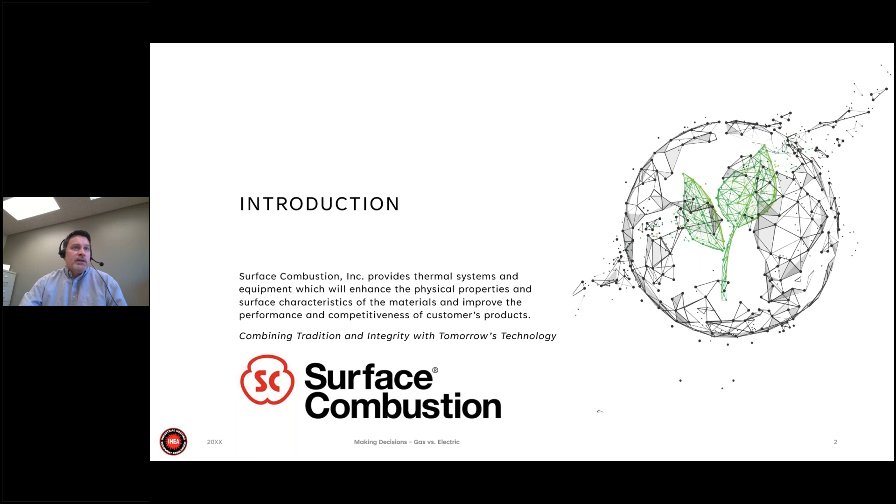As a furnace OEM and as others that provide furnaces, Surface Combustion is what we would say energy neutral on the selection of gas or electric heating. We can design either gas heated systems or electrically heated systems, and we offer both. What we intend to do here, like in this webinar, is to educate the customer on how it affects their application and other aspects of their operations.

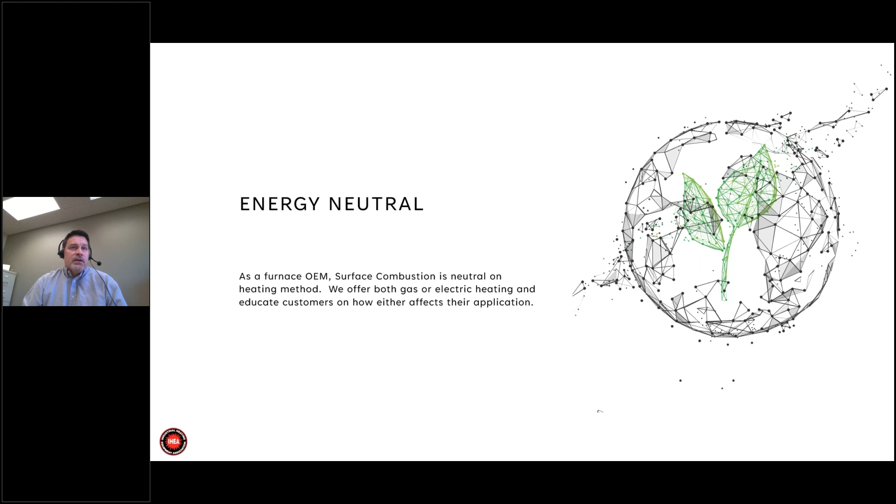This definition is actually IHEA's definition of electrification that I wanted to share here. It's reducing the emission of greenhouse gases or carbon emissions by converting fossil fuel usage to electric power supply by sustainable sources. That is one of the main topics here on the macro level, and the sustainable sources is really the secondary scope from the plant.

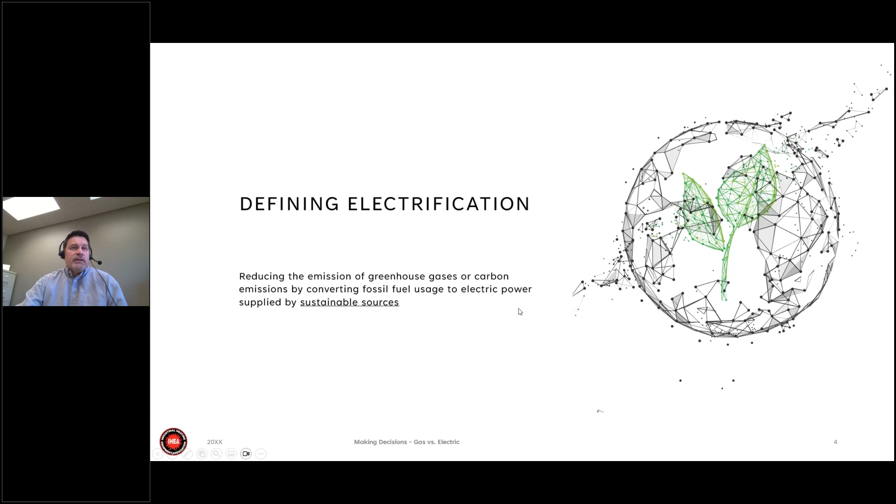So with that in mind, the overview of today's webinar is going to talk a little bit about a macro level, what's affecting the decisions of gas versus electric today, talk a little about gas heating systems and electric heating systems that are available, then compare some applications on a specific furnace type with selecting either gas or electric and how that might impact the actual furnace design, and then some conclusions.

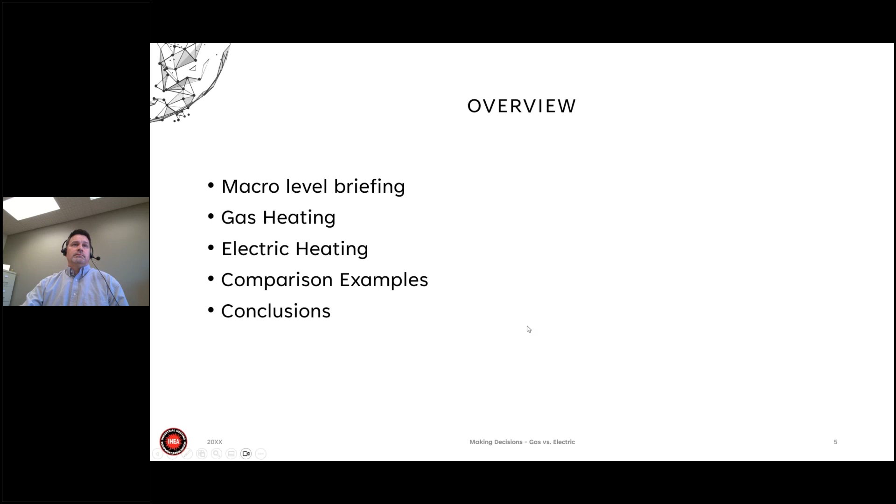So overall, an overarching macro level discussion here is we're looking at the commercial markets, some geopolitical issues, and regional demographics. After COVID, there's been a lot of supply chain recovery, and with the supply chain recovery, bringing things back near shore for geopolitical issues as well. But through this, there's environmental accords, global conflicts, and in each one of these topics, you can see at the bottom, energy, energy, energy, and it goes by like prices for the operations and commercial, geopolitical issues, the policy that's being in place and being enforced now, and then regional demographics, where you are located and what kind of energy you have available in your area.

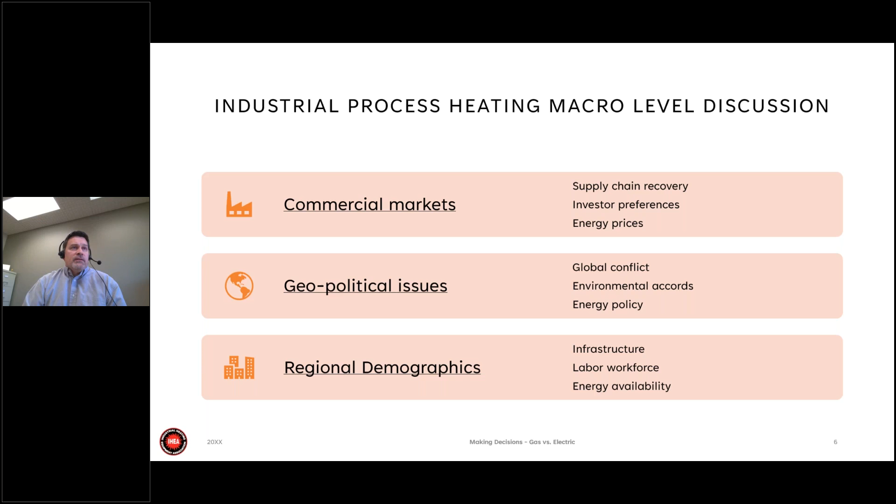Boardrooms more and more have been looking at this environmental, social, and governance aspect for investors to invest money in their organizations. ESG is paramount on a lot of decisions coming down for capital equipment. So we've been getting asked more and more to look at electrification of furnace designs. The ramp up of industrial production, relocation, nearshoring - as you bring production back, you're bringing it back with the purview that you're going to be needing to look at electrification. And then we're back to energy - you have to consider the policy, the availability, and the costs.

So in the US, and this goes back to sustainability, this chart is just showing where we are today with energy mix and emissions. Sustainability was to move from greenhouse gas emitting energy, where we are today in the US, to more sustainable energy. And as you can see, there's a mix of power sources that we have, but most of the power in the US here is from coal and natural gas.

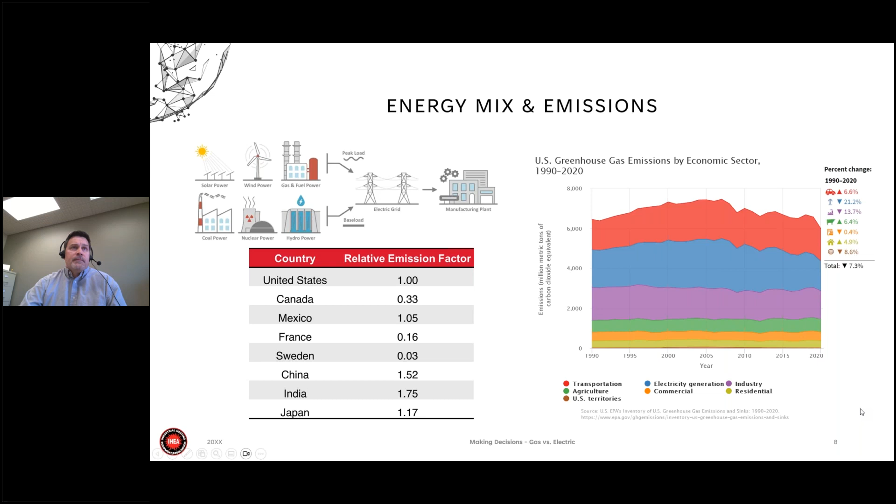So overall, there are some opportunities - looking for some subsidies, grants, or utilities cost sharing. It'd be wise to check into some of these opportunities. Grants are always a challenge to prepare, but they're worth looking into to see if you can have some networking and some co-development of projects. You can check on the federal and local subsidies for bringing production back to the US or into your existing plant. And then utilities are a good resource to see what kind of opportunities there are and to see what kind of available energy there is in their network.

Now, as we go to the plant floor from the macro level, we've typically been looking at what the best application is based on the amount of heat you can put into the furnace to try to get you the most production for your operation. But the environmental push for electrification has been pushing the pollutants upstream to scope 2, and for sustainability efforts, we would rather consider all the costs that you have from your plant operations, such as capital expenditures, maintenance, and operating costs.

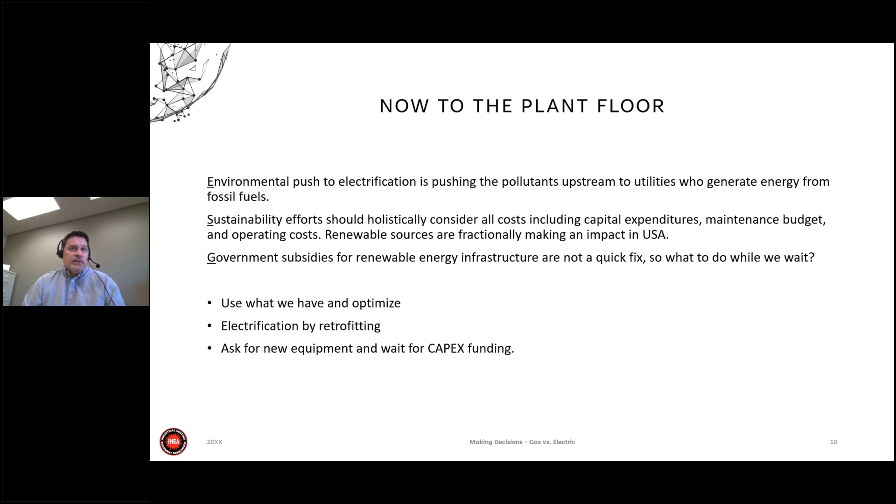So as far as making decisions, the historical thought process was to select the best furnace for a specified process first, then consider gas versus electric heating. And what we're going to be talking about here in this webinar are natural gas heated furnaces and resistance heating, electric heating elements. There are different types of gas heating or burners that you can look into - we're just going to comment on a couple of those. And there are different electric heating methods that could be topics for other discussions, from infrared to induction heating, but we're just going to be talking about resistance heating elements.

For gas heating, there are two types - you can have direct fired or indirect heated furnaces. The delineation is direct fired: your process gas or process atmosphere inside your furnace are the products of combustion. Some materials can be treated in that way, and typically it's the in-process parts that are in between - an annealing step or some kind of heat treatment step that's in process that will have continued operations in your plant. It can be set up to have recuperation for higher efficiency as well. And the fuel source is typically hydrocarbon. There are some oxy-fuel operations for glass melting, but really for this one, we're talking about natural gas burners.

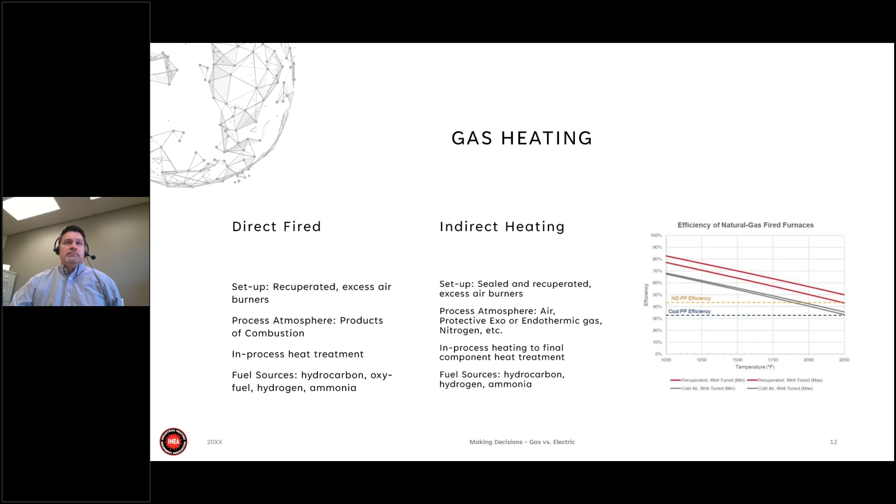The chart on the right is showing the efficiency of natural gas fired equipment at different temperatures. So if you have a specific temperature or process you're looking at, like carburizing at 1700 degrees, you can get a recuperated, well-tuned burner somewhere in the 65% efficient range. If you're generating that power with natural gas at a power plant, that's the gold line, you're having a lot of transmission losses to have an electric heated furnace, where you're going to be at like 45% efficiency. So it does make a lot of sense to have natural gas on a furnace still today.

Here's an example of an alloy radiant tube, which has indirect heating. The U-tube is one of the more common types of radiant tubes installed in furnaces. The setup is that you have a burner going down one of the legs of the U, and the exhaust comes out the other leg, where you would have a recuperator that heats up the air, and preheated air is then put into the burner to increase efficiencies.

The advantage of this compared to some of the other burners we'll see is that there are fewer burners and recuperators required in the setup. So there's a lower installed cost for this type of U-tube, but you have lower thermal efficiency than some of the other alloy radiant tubes we'll see here.

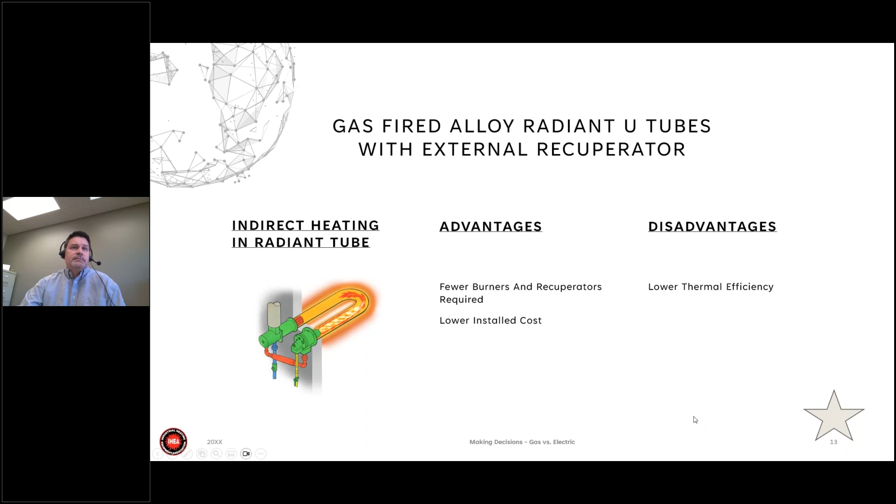This gas-fired radiant tube is actually a single-ended radiant tube, and it has alloy tubes with an internal recuperator. The burner sends the flame through the center of the burner tube, and along the walls of the radiant tube, the exhaust exits the burner. This gives higher thermal efficiency due to the residence time of the flame.

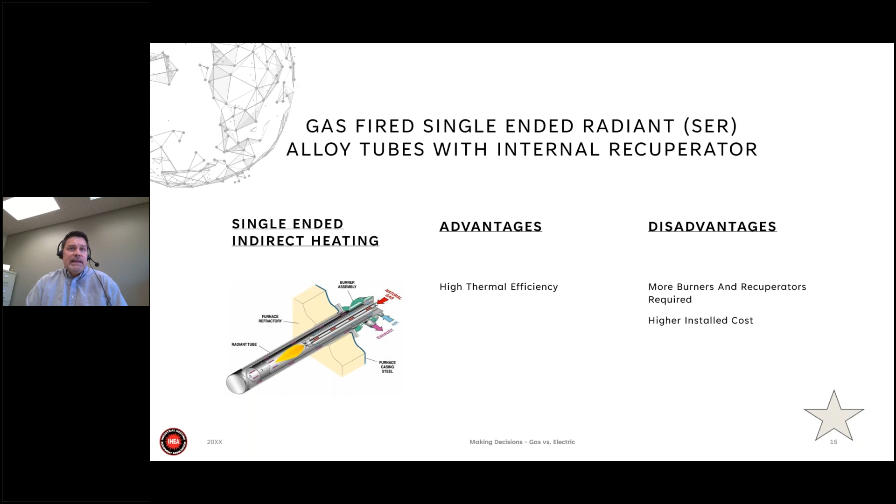But there's only one leg or one tube, so you need more burners and recuperators to get the same amount of heat input, and so there's a higher installed cost.

If we look at materials selection on the radiant tube, we're changing the alloy radiant tube in this design for a silicon carbide radiant tube, which has a greater heat flux and heat release to the furnace chamber. So it has the ability to reduce the number of burners or radiant tubes you have inside the furnace. It has the same setup as the single-ended radiant tube, but just with the silicon carbide tube.

It would have the highest thermal efficiency and the longest tube life. Now, noting that longest tube life, you're removing the high temperature thermal creep of the alloy radiant tubes that you have. So it's eliminating that, and that's what helps extend the tube life.

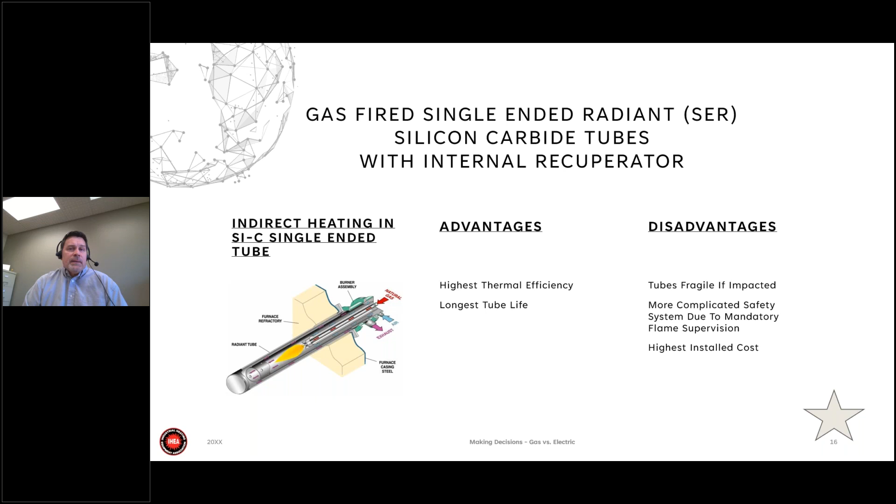But the tubes themselves are fragile, and you have to take care not to have any mechanical contact with the tubes. And there are still safety system requirements for mandatory flame supervision that get a little complicated with the silicon carbide tubes. And just the cost of the silicon carbide tubes themselves makes this option the highest installed cost.

So we're going to look at some of the electric heating technologies that can be applied.

Overall, the advantage of electric heating is that in theory it's 100% efficient. As soon as you turn it on, all the heat is going into the chamber, but we do have some transmission losses from the energy from scope 2. You do remove all the pollutants from the heating system at site, and then you have better working conditions around the furnace as well. You don't have any heat coming off the burners, so it's nicer to work around, not as noisy. You don't have to have the blowers for the combustion system, and it also has the best temperature uniformity and control.

Some of the disadvantages today are that payback is limited due to operating costs and the cost of utilities. The capital costs are expensive for VRTs and for electrical control, and maintenance costs are still fairly high for some of the types we're going to look at. And they are susceptible to breakage and failure, and you're only limited to thermal radiation in a lot of the instances here.

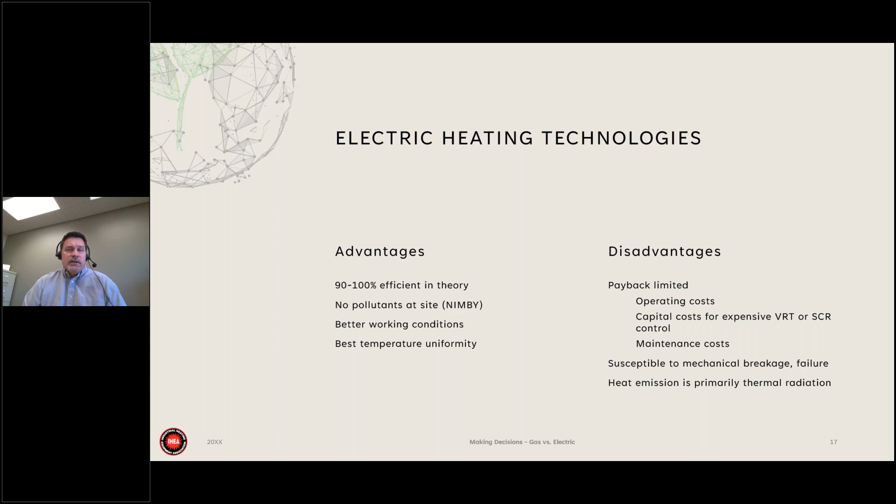So the electric heating elements inside of a radiant tube would be put inside of a single-ended radiant tube like the gas heated system, so they can be applied in the same type of form as the gas-fired radiant tubes. So this might be an option for retrofitting if you had single-ended gas-fired radiant tubes.

These have low initial costs and good temperature uniformity, and they actually perform better compared to gas at lower temperatures. One of the advantages here is if you're looking at retrofitting or in a new design, is that they can be used with hydrocarbon atmospheres such as endothermic or exothermic gas.

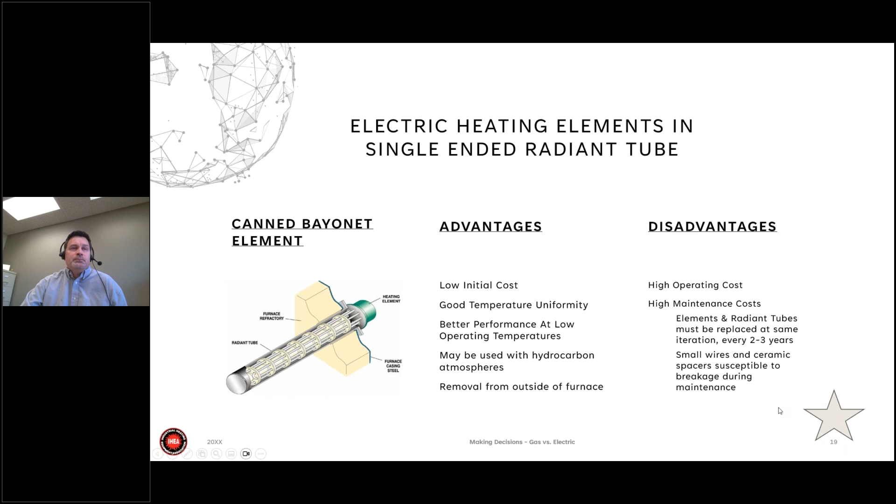These electric heating elements are also good for hydrocarbon atmospheres, such as RX gas for carburizing, endothermic gas. And as shown in the photo, the element is actually a tube, a bent tube that has an airstream going through the center of it. So it's 330 alloy, so it's good for these atmospheres. The airflow through the center actually helps self-decarburize, pulls the carbon out of the tube, so it extends the life. And it's a very robust system.

It's an inch diameter, so it has extremely low risk for breakage. It has good temperature uniformity because you can have a bank of these along your wall. Let's say on a batch integral quench furnace, you can have up to 3 of these on either side, and you can tune them from front to back, so you have very good flexibility to get tight tolerance on temperature.

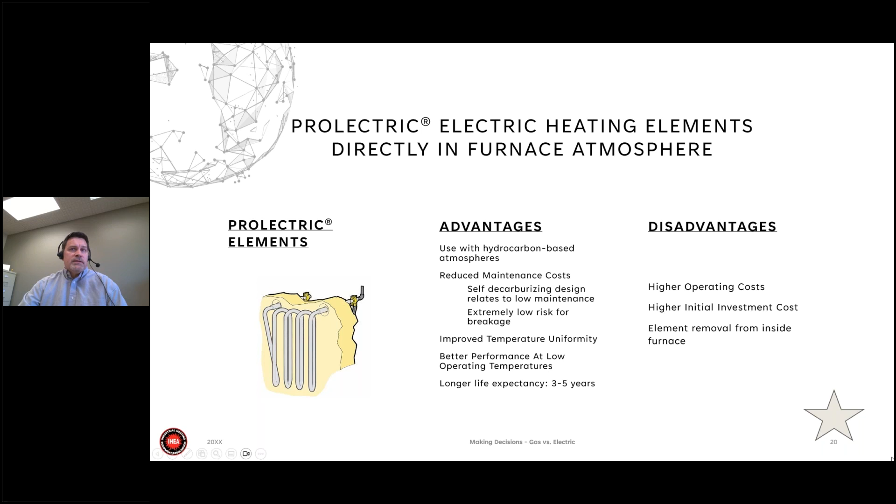And they also do perform well as a common theme for electric heating at low temperatures. This has the longest life expectancy out of the electric heating options that we'll share here today. The major disadvantage for the Prolectric is that you have to enter the furnace in order to remove these elements, but after doing some inspection, they could last much longer than what's shown here if you follow the burnout and other maintenance instructions for the furnaces.

This rod overbend electric heating element is different from the Prolectric because it really is rod, it's not a tube. These are anchored to the wall and actually embedded in the ceramic fiber insulation modules, so you can wrap the furnace walls with these heating elements.

They have high thermal efficiency and they're fairly easy to install and easy to maintain. You can just remove one and then re-weld it to replace the area. So they make them a good option for a cost-effective solution for electric heating.

One thing that you'll have to check on is the application guide and check with the heating element provider, because these elements are not suitable for all atmospheres, and they are made out of different elements, so you have to select the right element for your application.

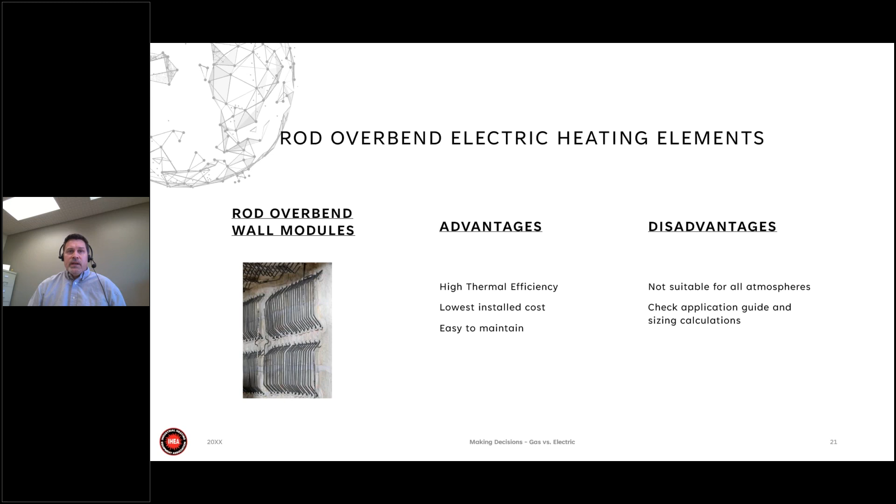This ERT design, which is an electrified radiant tube, it's like the U tube that we had shown previously, or actually this one is a Trident tube. On the bottom left, you'll see a lot of copper bus bars going around the outside of the radiant tubes on the exterior of the furnace. This would actually make the three-legged Trident tube the heating element, and you would have resistance heating on the Trident tube.

This technology was developed in the 70s to be able to switch between electric and natural gas, as you know the utilities costs were fluctuating in the 70s, but it could still apply today if you wanted to have both options available, although it does come with a higher price tag and more maintenance because you're maintaining and installing dual systems here.

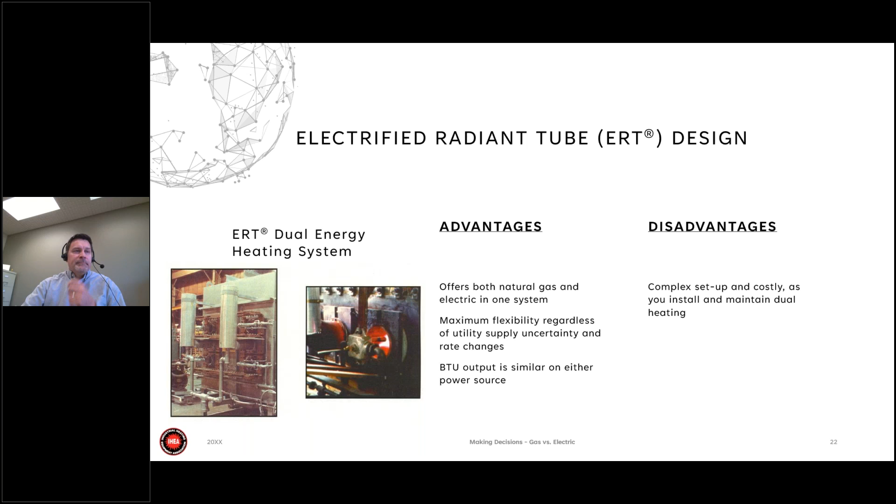The silicon carbide resistance heating elements. This one here is a dual leg silicon carbide heating element where it's installed at the top of the furnace of this rotary hearth furnace. And you can see there the light yellow lines are the glow bars that are extending into the furnace around the inner diameter of the furnace that has been removed to show the inside.

These silicon carbide elements have high thermal efficiency, and they have maximum operating temperatures that go above indirect gas heating, so you can apply them to higher temperature processes.

These elements actually do get brittle and will break if they're stressed at all. The high maintenance cost for these really is that you have them set up in a series of three. So as you have to change one of them, you should probably change all of them that are on that circuit. Otherwise, you'll have different resistivities that will cause some other maintenance issues.

So in hydrocarbon atmospheres as well, you want to make sure that you're not getting any shorting out, and making sure that you have good connection or insulating the elements from any kind of carbon buildup.

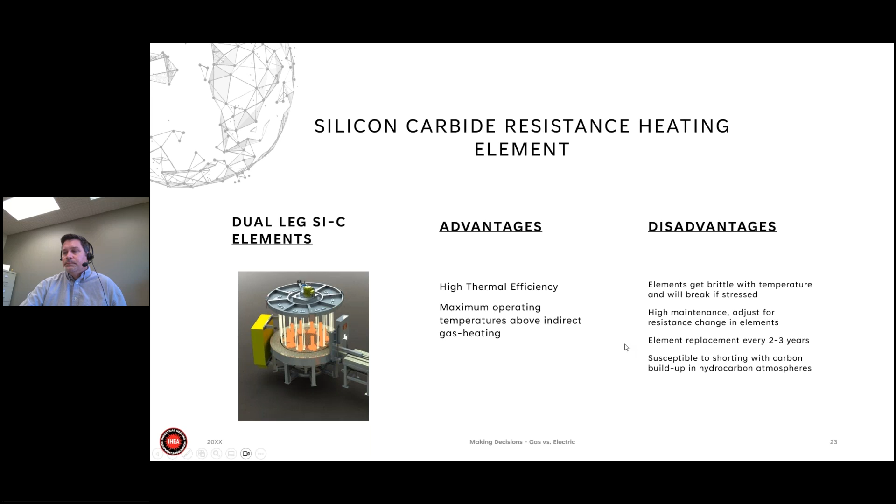So now moving into an example comparing gas versus electric. The first example is going to be a batch integral quench furnace.

This batch integral quench furnace is shown in a photo on the right. It has a hot zone with RX endothermic gas and natural gas enriching in the hot zone. And then, once it exits the hot zone, it comes out to the vestibule shown here, into the oil quench at the bottom of this vestibule. Typically used for carburizing, carbonitriding, and ferritic nitrocarburizing, or neutral hardening.

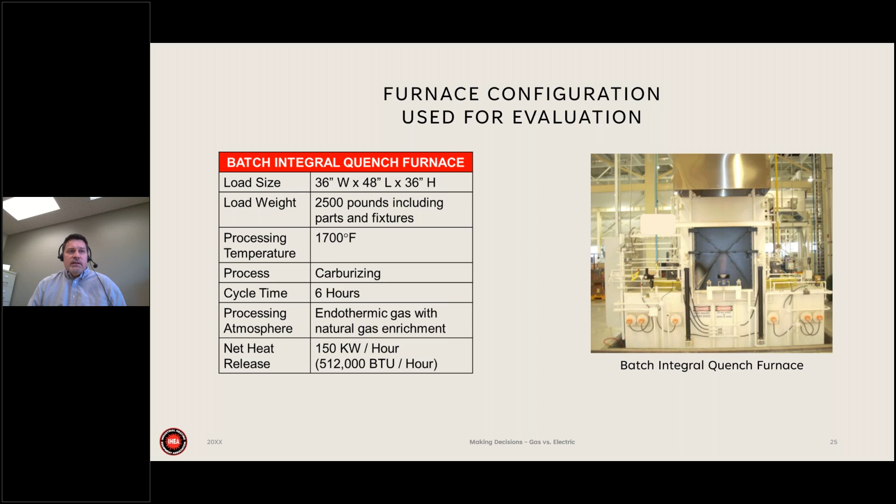The furnace used in the evaluation of the data I'm going to share had a 36-48-36 hot zone size, and the load weight was 2,500 pounds, including the fixture and the parts. So that's gross loading. Operating at 1,700 degrees, carburizing for 6 hours, and I mentioned the process atmosphere already, with a net heat release of 512,000 BTUs per hour.

Other assumptions in the calculations are a net heat release of 50 BTUs per square inch per hour and 90 BTUs per square inch per hour for alloy radiant tubes and silicon carbide materials, respectively.

I'm sharing the natural gas costs that we're using in the calculation. These can be rerun for any of your local actual costs at your plant. But it was $10, and then 10 cents per kilowatt hour for comparison.

And all the installed costs, when we talk about total costs here, we're including all these miscellaneous items, just making sure they're all included so you have a full system, such as burners, radiant tubes, heat recovery devices, air blowers if required, exhaust hoods, installation, and all the other components. And we're just looking at 6,000 hour per year operation.

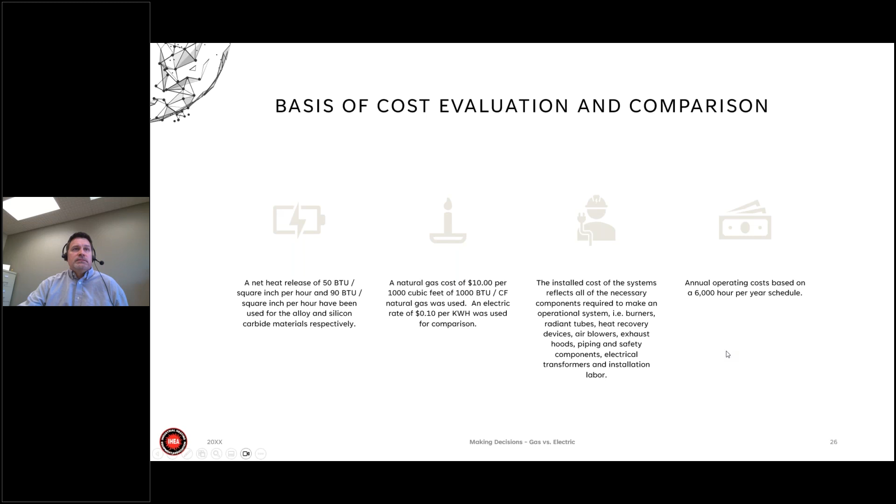So these tables comparing the different types of heating sources, at the top you'll see alloy tubes, alloy single-ended, silicon carbide single-ended radiant tubes, and then the final two columns are the electric heating options. So the first three are gas heated.

As we go down the columns, you can see how many tubes are required for each of the heat sources, the tube material, and then really what we're trying to do is get in the same amount of heat input for each of these options. And then we'll see what kind of operating cost we have to do the cycle.

So with the heating system, operating cost for a 2,500 pound load, you can see that the cost going from gas heating to electric is more expensive for the same process. And in the installed system cost, you can see the silicon carbide, as I mentioned in the center, is most costly. And then the total annual operating cost at 6,000 hours is shown, and the 20-year utility cost is shown at the bottom.

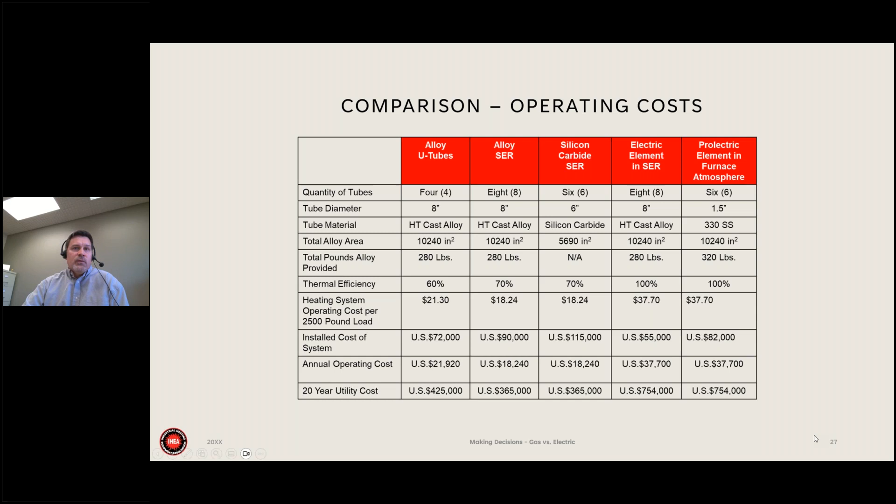You can see that electric heating is most expensive, but the installed cost of the system is less. So if you're looking to invest in electric now, and have the assumption that there will be less expensive renewable energy in the future, that would be something you can invest in now and look for ways to conserve and turn to renewable energy.

Some of the maintenance cost considerations are the same. It's showing the gas heated on the first three columns and electric on the final two.

The Prolectric has the highest operating reliability for electric, while for atmospheric contamination, the single-ended electric heating element has the highest reliability. So the alloy U-tubes and alloy are most susceptible to atmospheric contamination.

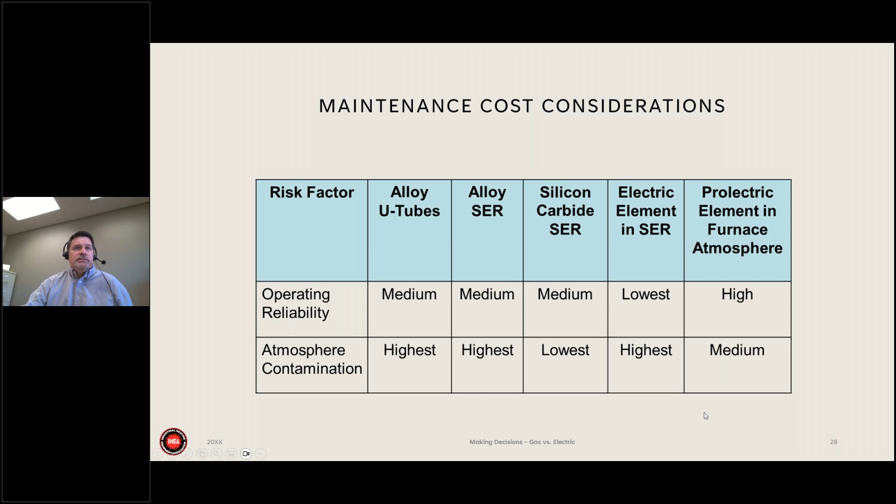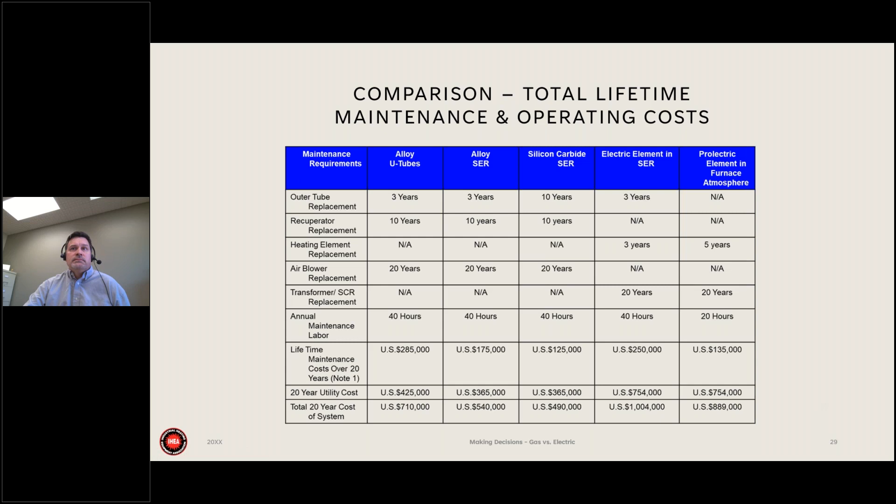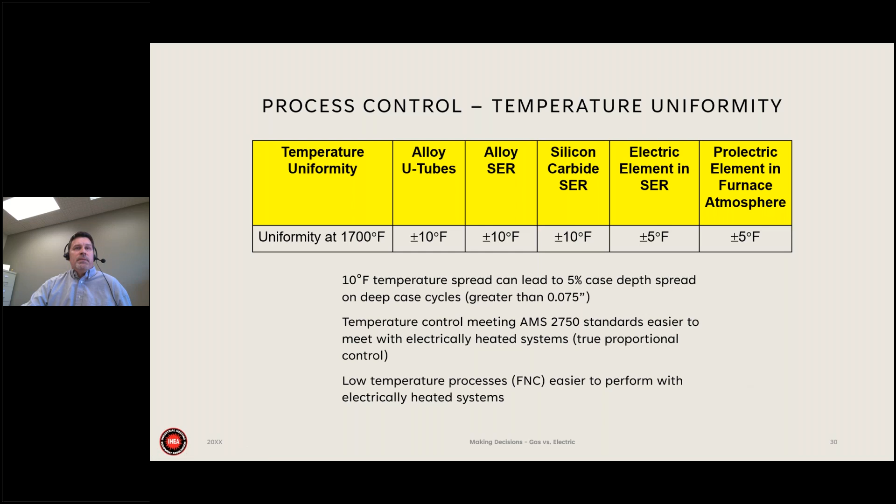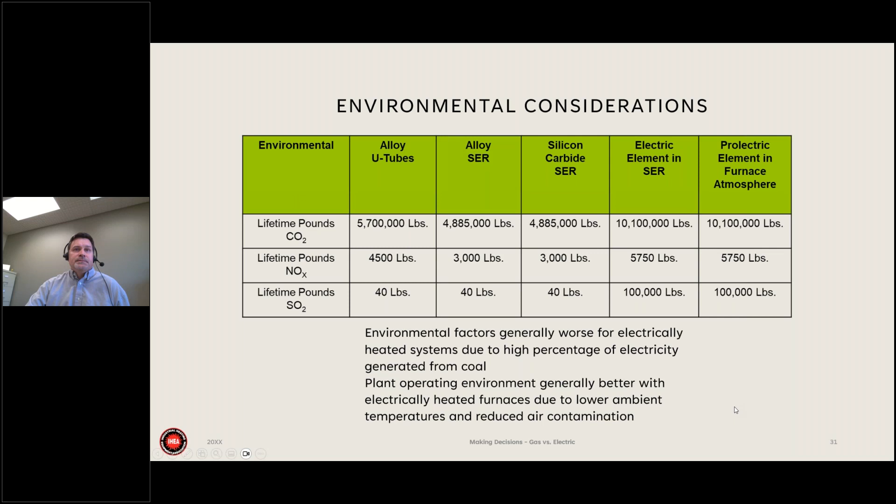We're going to compare a couple other furnace types here, comparing gas versus electric. For a couple types of continuous furnaces, a direct fired versus an air electric furnace, and then vacuum furnace, to show some options there.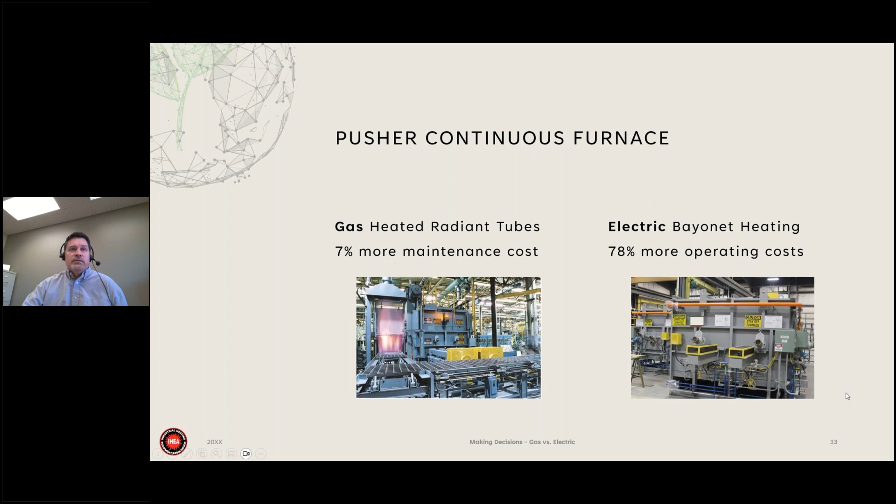However, when you use electric bayonet heating in place of gas, the operating costs are like 78% more costly. So the operating costs, again, are a main concern when trying to choose gas versus electric.

This is a table showing in blue the gas-fired versus electric options for a single row pusher using process endothermic gas, RX gas. Process gas has its own carbon footprint, but it is required in order to do the value-add process for heat treatment. So that will be carried for either option here, gas or electric.

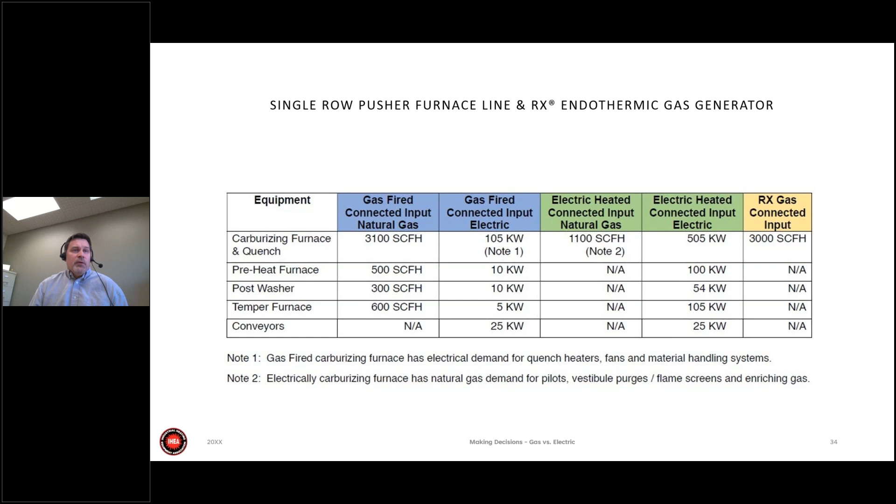In the carburizing furnace, it says 3100 connected, but really it's 2000 for the heating. In the electric heated version, you can see there's 1100 SCFH of natural gas required, and the notes below say that is for intermittent flame screens and purges, and the column for enriching process gas is always required. So this just gives a sum total and a comparison that we can calculate and offer both types, even for continuous pushers.

This type of furnace is a belt furnace. It could be a mesh belt, or in this case, a cast belt furnace. Cast belts offer heavier loading.

The gas type here was a direct fired with pulse fire and recuperation. It cost 5% more, not much of a penalty or savings going either way here. And the connected heat input for the process and production volume was 3.5 million BTUs connected.

The electric option here employed a mix of both the modular rod overbend type heating elements you can see above the hearth, and below the hearth we actually used bayonet inside of radiant tubes to help with the mechanical damage below from anything falling down from scale or the like. And it had a connected power of 1 megawatt. So you have to make sure that you have enough facilities, power from your utility company when you're going to be looking at installing this. It adds up quickly.

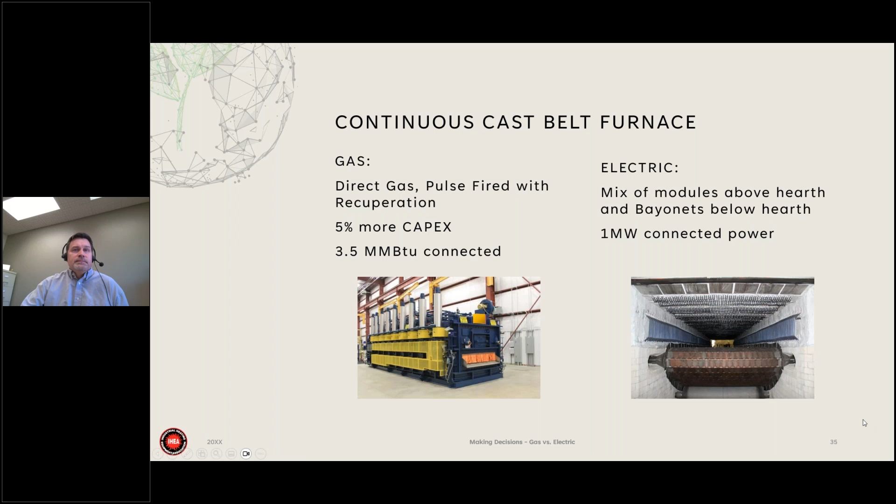Here's an example of direct fired versus electric air furnaces. These would probably be very common in heat treat and in process heat treatment. The direct fired uses product of combustion. It helps mitigate the amount of scale growth on steel parts. You can get radiation and convection with burner placement and flue exhaust, so you can get a good recirculation inside the furnace.

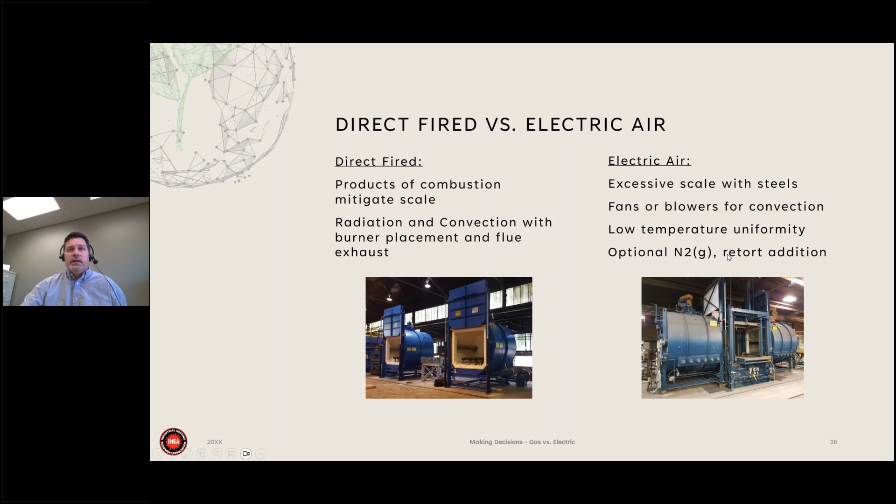The electric air furnaces tend to create more scale at higher and higher temperatures with the presence of oxygen. But you could, at this point, put in optional nitrogen gas or have it in a retort in order to keep the work in the process free of oxygen, although then that enters into its own scope 2 energy requirements for industrial gases.

I wanted to include something on vacuum furnaces because typically the choice is electric, and that seems to be the most common choice here, but there are opportunities for gas, and some reasons why you would choose one or the other.

Gas can actually have a radiant tube that has a tight, vacuum-tight seal, so you can set burners inside the vacuum chamber using silicon carbide or alloy radiant tubes. Silicon carbide is shown in the furnace at the bottom. The temperature ranges using gas heating in a vacuum furnace are ideal for vacuum carburizing and also for tempering. So if you're in an area with gas, it's a good opportunity to use gas in that instance.

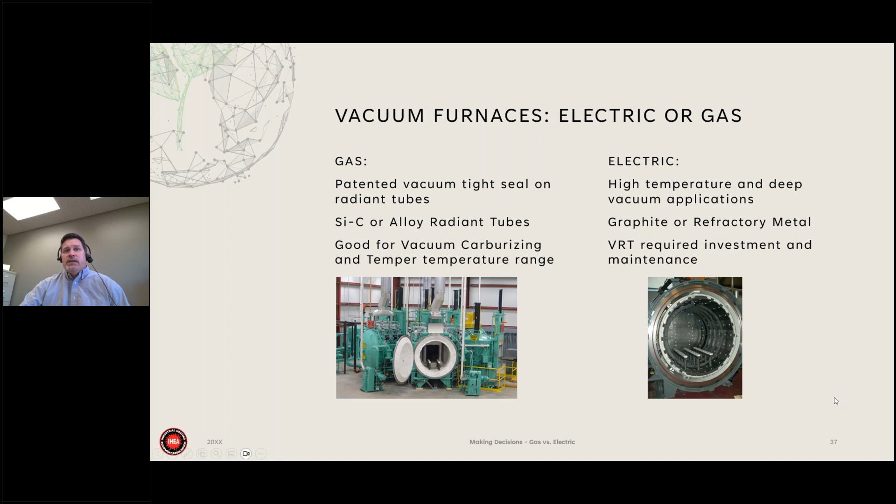For electric, it's best for high temperature and deep vacuum applications, really all vacuum applications, but ideally high temperature and deep vacuum. There are different materials of construction you can use, whether graphite heating elements as shown in the photo at the bottom, or an all refractory metal hot zone with resistance heating as well, electric. And then you'll need the VRT investment and maintenance.

This gives an example of a vacuum temper cycle using the utility costs shown at the top, gas and electric, comparing them for a 1,200 pound load at 1,050 degrees. The operating cost per cycle is shown on the time temperature chart, and it's half the price to do it with gas. So this is an opportunity seldom thought of for vacuum, but if you're electrifying, you can calculate how much it's going to cost to do the same cycle.

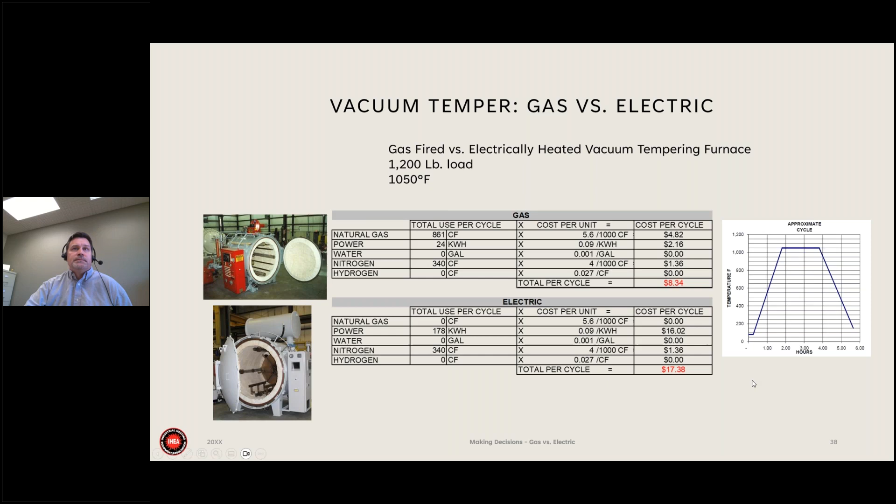So for some, excuse me one second.

For retrofit options, some considerations for electrification: if you're going to retrofit your current furnaces with electric resistance heating elements, you have to consider the plant infrastructure. Do you have the switch gear? Do you have the power supply? Is it available from the utility? Are you in a region where electric costs less than typical, and maybe there are some advantages there.

There are major mechanical modifications required to the furnace, and these are often underestimated because you have to touch the furnace twice. You have to uninstall, modify the casing perhaps, and then install the new heating system. And this is always on the operations floor, probably the most inefficient place to do this, as opposed to getting a new furnace with a new heating system installed. When you look at retrofitting, you're normally going to need to derate the furnace capacity and throughput production.

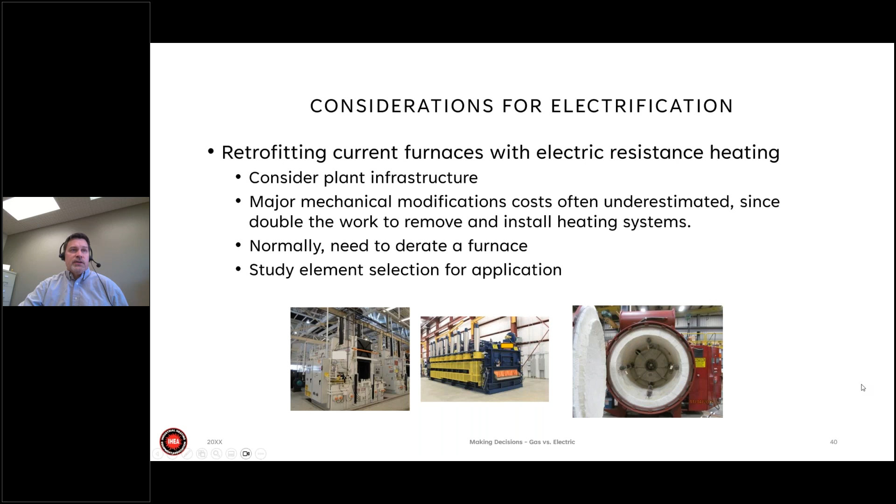You're not going to be able to fit as much heating in as you could with natural gas. You just get much more heating input with natural gas. And then you want to make certain you're studying the element selection and material type for the application. It could be a batch integral quench furnace, continuous belt, or a vacuum furnace - they all have different atmospheres. You want to make sure you're talking to your furnace supplier or the electric element provider to do that.

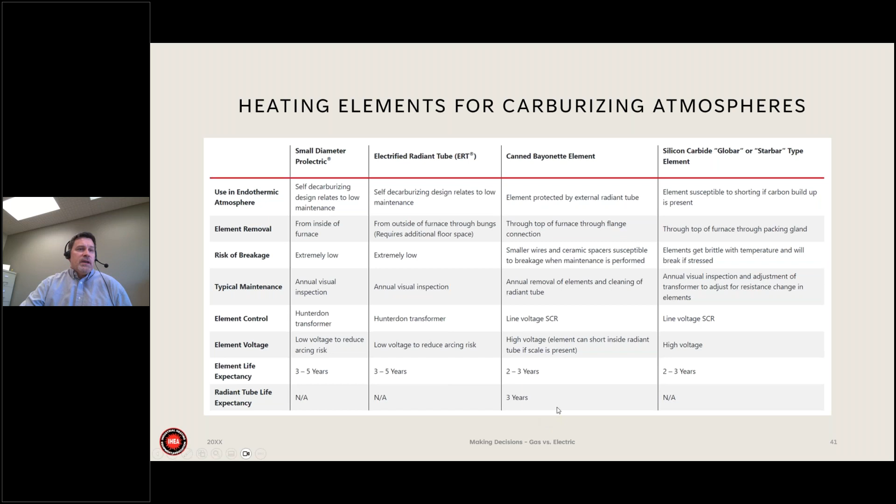As you're looking at different types of heating elements you might want to retrofit your furnace with, this gives an example of the Prolectric electrified radiant tube, canned bayonet, single-ended radiant tube type, or the silicon carbide. It gives pros and cons of each and different applications. If you were going to use it in an endothermic atmosphere, it gives you the best options for maintenance, element removal, risk of breakage, and what you have to do for maintenance, plus expected element life. And if it's a radiant tube, you have to replace it as well with the electric heating element, as I mentioned before.

So as we consider all this and look at making decisions for gas, the current situation is that I'd ask that you don't make your greenhouse gas problems worse. If your electric utility is using coal or fossil fuels to generate energy, it makes sense to use natural gas at your plant to do the heat treatment - it's higher efficiency. As you can see in the table below, this considers electric power generated from a natural gas fired utility, with a couple different furnace types. There's the scope 2 in the electric footprint row - if you have gas fired, you're only generating 53 kilograms CO2, as opposed to the scope 2 addition to get double that for the electric heating options.

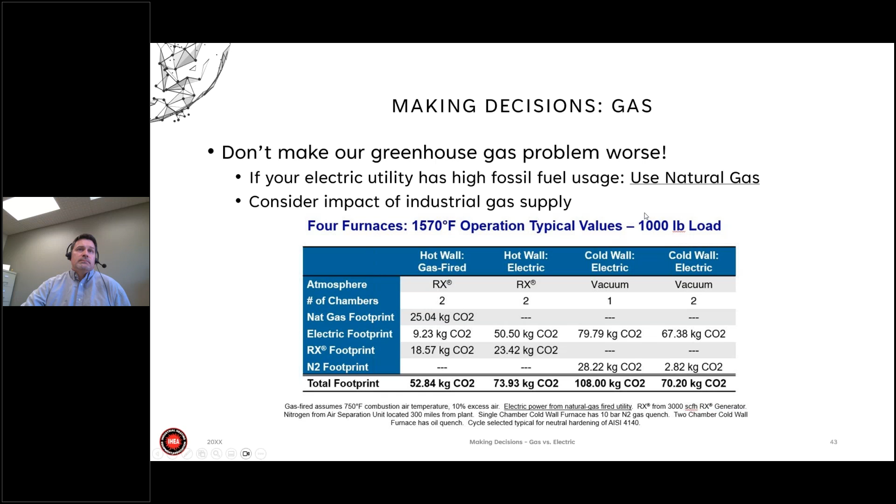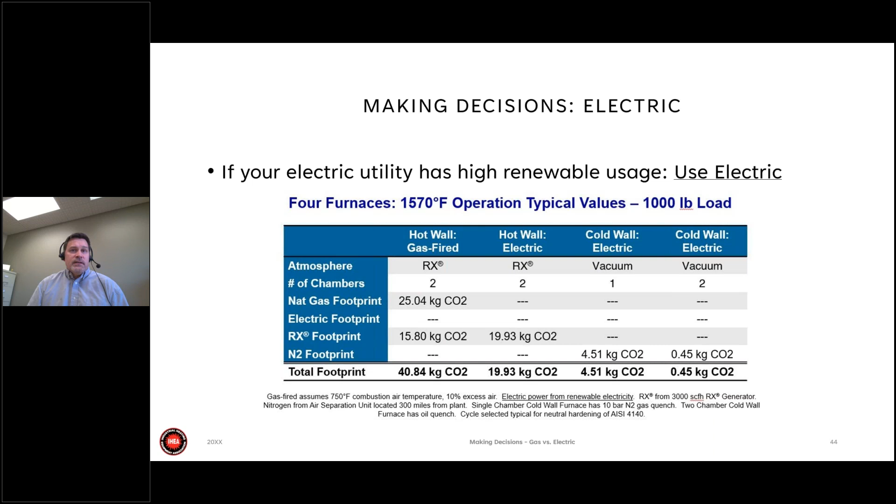So if you're going to choose electric, it would be a no-brainer if your utility is using high renewable energy, or if you have access to renewable energy, because the scope 2 emissions and penalties go away, and electric on site really helps and removes the carbon dioxide from the operations. You can see the cold wall electric with a 2-chamber vacuum is very low at that point, only using some nitrogen industrial gas, and that's what the scope 2 would be in that case.

In conclusion, just to recap, you should first try to select the furnace type based on production, material, and try to see what kind of process you're going to need for atmosphere, temperature, any kind of contaminants that would be coming from the part or from the process, and how that would apply and affect your heat source. So in this paradigm, you would be looking at the heat source third to make sure you have the right heat treatment process.

Although currently the headwinds are to make the heat source choice first for electric, and then you want to look at the cost for investment, operating and maintenance costs. But going into these costs are the costs for the environment, trying to help give environmental benefits for the workplace and Earth. So going electric in the future would be great for everyone.

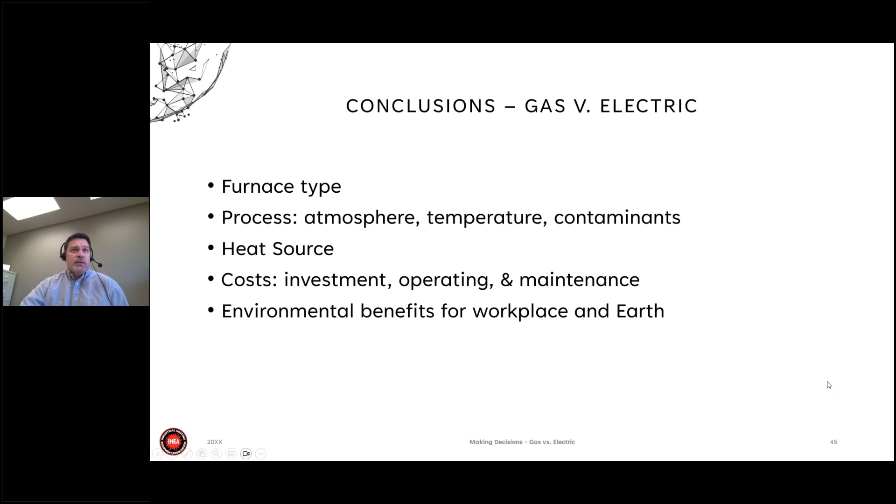Just giving an update of where we are today and how we would consider choosing between gas and electric. So the final thought was that operating costs have a significantly higher impact on the lifetime costs. I think at this point that's what I had to present, and I'll see if anybody has any questions.

All right, and thank you very much. Very educational for me. I've often wondered and discussed with a lot of our customers what are the variables that go into the decision of gas versus electric, and beyond maybe regional and things of that nature.

But a couple questions. One, are there opportunities for, say, hybrid designs with both gas and electric heating?

Yeah, there are. If you wanted to retrofit and try to limit the amount of gas you're putting in, we could look at putting electric heating into the single-ended units, where the single-ended gas-fired radiant tubes were before. We could put the bayonet style in there. That would be on a continuous furnace. You'd probably want to do that in the last zones that are the holding temperature, so you don't have as much heat input needed in those zones. So you can have electric in those areas, but where you need the highest heat input, it might make sense to have gas. So at the entrance of a continuous furnace, it would make sense.